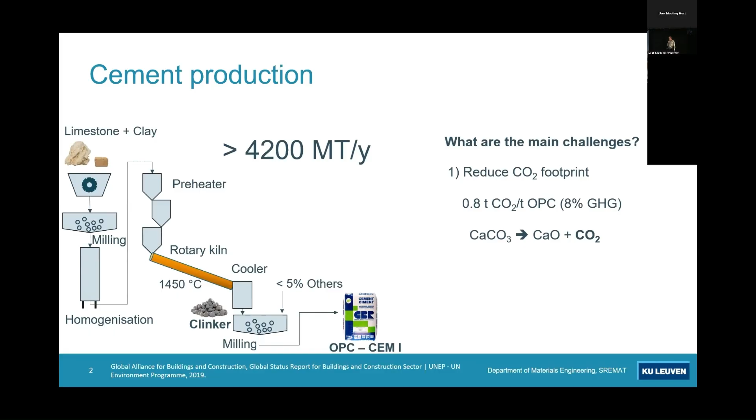So what has been done in the past is to reduce the amount of Portland clinker with various waste residues - fly ashes, blast furnace slags, calcined clays now being very popular, and limestone - to reduce the amount of Portland clinker while maintaining most properties, which for concrete and cement producers means compressive strength. There has been other research trying to find alternatives that eliminate Portland clinker entirely, but these are still, I would say, in their child shoes because they have some technical challenges.

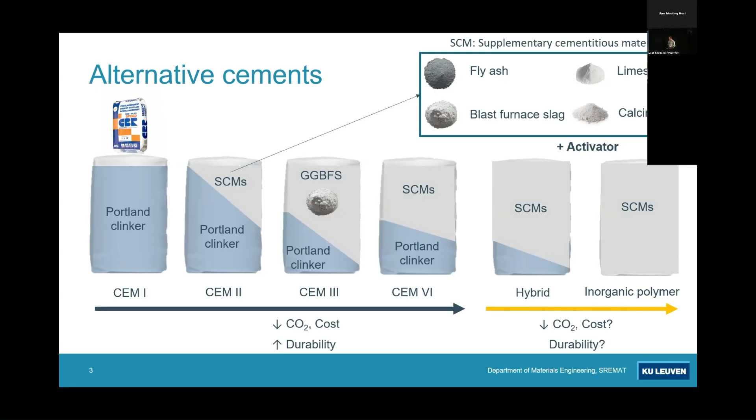So we need quite a lot of supplementary cementitious materials.

We need a lot of supplementary cementitious materials to replace Portland clinker, and there are quite some options out there. However, the most popular options, blast furnace slag and fly ash, are decreasing. Blast furnace slag is probably decreasing due to the electrical transition - processes are being changed, for example, to electric arc furnaces.

Fly ashes are decreasing because we don't combust that much coal. So we need new materials that can replace Portland clinker, and in very high volumes, because the CO2 emissions are somewhat unavoidable from Portland clinker production. So the more we can replace, the better.

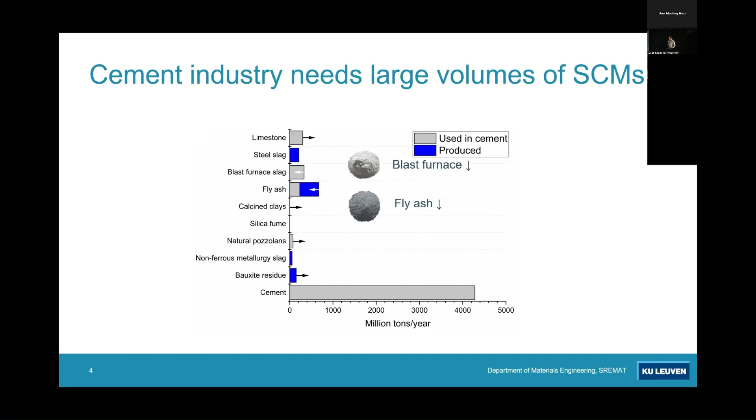So therefore, slags and tailings come into the picture. They don't represent that big a volume compared to Portland cement, but every material can help reduce the amount of Portland cement. Modification of steel slags, for example, is a hot topic which I will also talk about.

In this presentation, I want to put forward two options we mainly investigated in Leuven to form new cement substitutes, these SCMs, and how we use FactSage for that. The first case study is that we do hot modification of slag - we add something to the slag that makes it more amorphous after granulation and more reactive as a cement substitute.

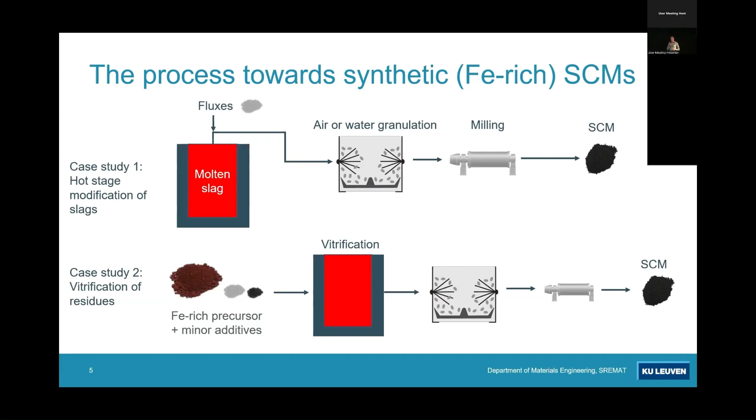Then the second case I want to present is the use of tailings - here, bauxite residue - to vitrify this material and cool it down very fast to create a Portland cement substitute. These processes reduce CO2 emissions because you don't use that much limestone, and it's also quite interesting because you can valorize byproducts which are now used in low-grade applications or even not used at all, for example bauxite residue.

So the first case study is for electric arc furnace slags. I want to thank Holcim and Nucor for sponsoring this work and also letting me share this.

So just a brief overview - there are different routes to produce steel. A very popular electric route is the use of an electric arc furnace, which Nucor in the US is operating for all its plants. Basically, you take scrap, DRI, and some fluxes to produce steel in the electric arc furnace. The slag is then tapped out, put in a slag pot, and that slag pot goes to the slag yard and dumps out the slag, and it cools down there.

And what basically happens is you crush it up, you magnetically separate it to recover some remaining metals, and then you have a slag which has a very low value, mainly used as aggregate, plus that tiny bit of metal.

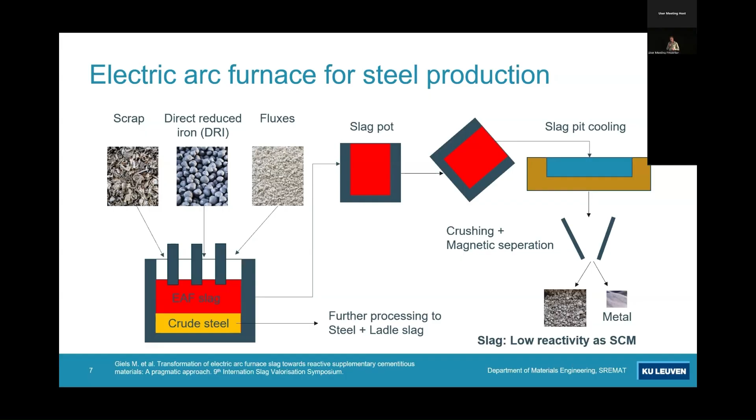So the question was, can we upgrade this, and how should we do this? We proposed a high temperature solution. But if you want to already screen some solutions, FactSage can be something nice to use.

So there are different ways to produce upgraded slag, I would say. We have the solution on the left side.

There you actually take the electric arc furnace slag, but you add reductants such as carbon. You can also use aluminium, like aluminium drosses, to produce a metal. There you actually extract the metal, capturing chrome and vanadium. Then you have a slag which looks like blast furnace slag, actually a very easy route.

Economically, this is a challenging aspect. The steel producers are not jumping for this because it costs a lot of money.

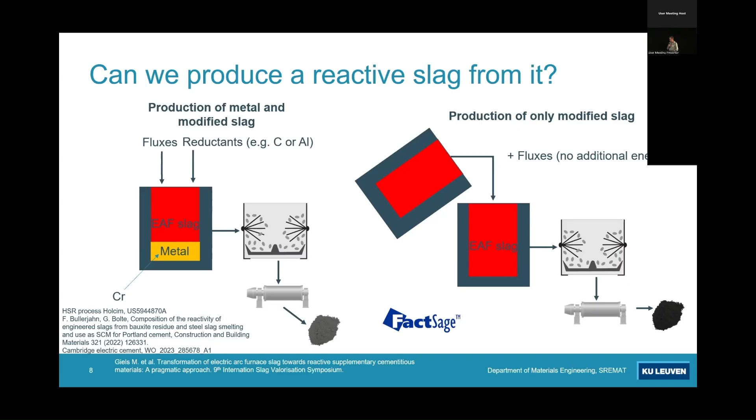So we were looking into a more economical solution by just, when they're pouring the slag out of the EAF, basically putting additions to it—fluxes, minor fluxes—that lower the liquidus temperature while keeping the slag molten. The melt temperature is dropping, but the liquidus temperature is dropping faster, so the material stays in a melt, in theory. Then you create this material, which can be an upgraded SCM.

One more aspect to introduce: liquidus temperature is important because it determines the processing temperature, but also glass forming ability. We want to create something amorphous, and to create a glass or amorphous structure, we have to cool our material very fast. For steel slags, it's very difficult—it's very basic, so it crystallizes very easily. So we have to reduce the critical cooling rate.

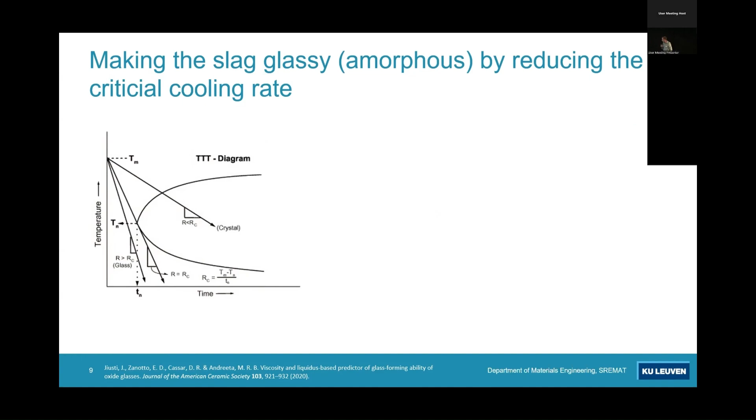The critical cooling rate is the rate at which you cannot form any crystals anymore. If you put it in a TTT diagram, that's the line on the left which you have to obtain. Experimentally this is difficult, but it can be done.

But there's a nice gem I discovered some time ago, a nice paper linking the critical cooling rate to the viscosity and liquidus temperature. Basically you can imagine it a bit like glass making. A good glass has a low liquidus temperature and a high viscosity—a very viscous mix and a very low melting temperature. That's ideal to form a glass.

Of course, with slags, going that viscous is not possible—you will not get the slag out of the slag pot, but this is an ideal scenario. So there's a formula devised in that paper that lets you calculate glass forming ability.

So can you get these parameters from FactSage? Yes—just using the equilib and also the viscosity model gives you these parameters. We can also measure this at KU Leuven, but it's easier if you can calculate it much faster.

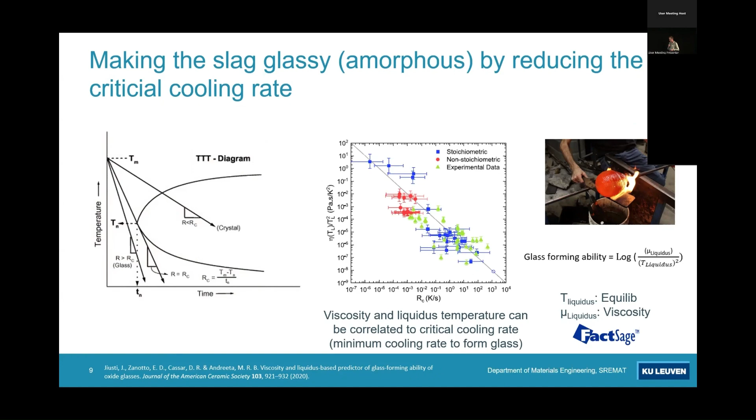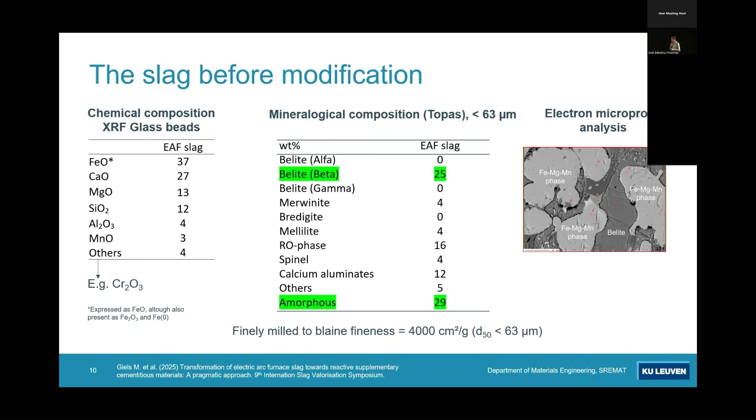So just something about the slag before going into the results: this is typical EAF slag, from Nucor, quite iron rich. If you look at the slag as is, it has very low amorphous content. For the cement people, we would like to see that amorphous content higher, because amorphous most of the time means more reactivity. But there are also other minerals inside which can be interesting as they have latent hydraulic properties. However, for now, we focused on optimizing the amorphous content.

So we used FactSage to do some modeling. Basically, we added silica and alumina to increase or decrease the liquidus temperature, and checked the effect on this liquidus temperature. We saw silica and/or alumina addition reduced liquidus temperature—not so new yet. We did that also to see if the melt is freezing.

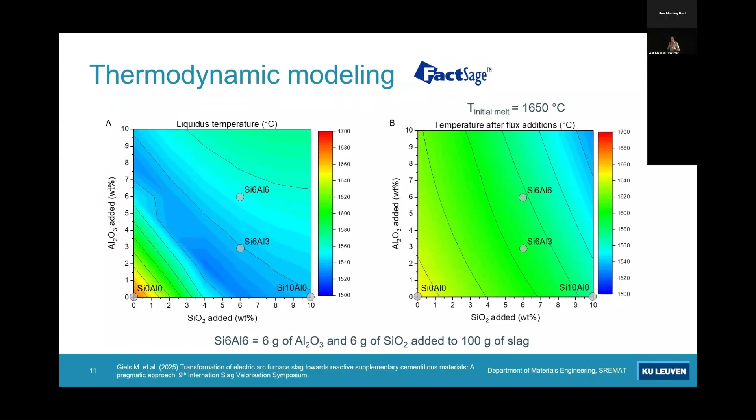If you add these additions, after about 2%, more or less, all the additions you do lower the liquidus temperature much more than the melt itself. So in theory, the melt should not freeze when you add these additions.

Then we can also model the glass forming ability. The more bluish it is, the better the glass forming ability—so the lower the critical cooling rate you need. We've seen that if you add some additions, the critical cooling rate, or the glass forming ability, becomes bluish, which is good.

I've plotted here, for some residues we had produced in our labs, the amorphous content versus the viscosity over the liquidus temperature. We actually see that from a value of -6, you get close to 100% amorphous, and that's actually the target.

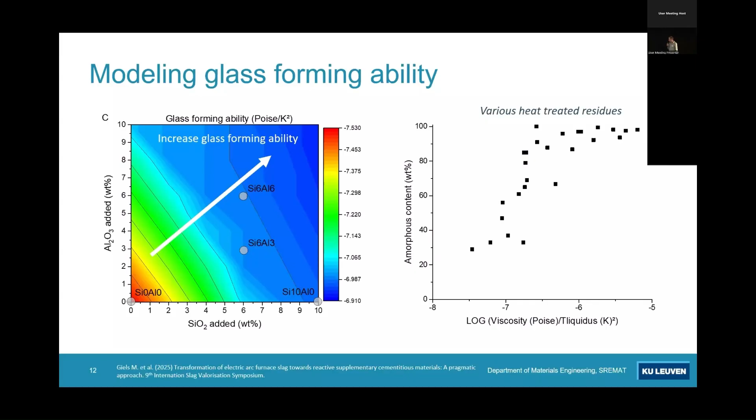However, we know it's very difficult with steel slags to do this—we have to add a lot of fluxes. So we will be somewhere around 60% amorphous, around -7 to -6.5 with respect to glass forming ability.

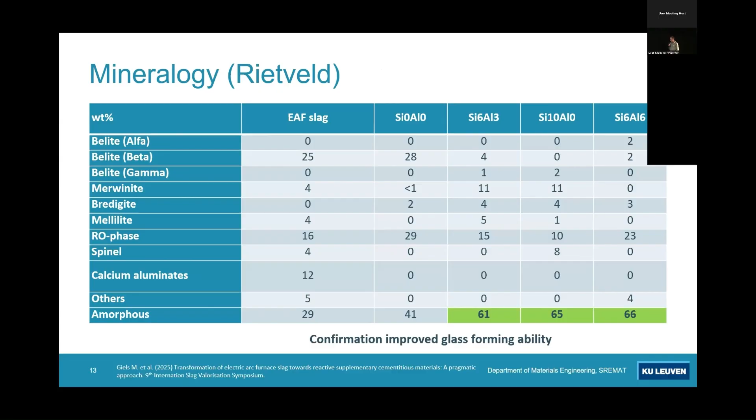So we did these tests using this new parameter to guide our experiments. We chose some experiments as indicated on these heat maps, and found that indeed, the more you add silica and alumina as predicted with that formula, you can create more amorphous content—in line with what we expected based on our plots, that we could get around 60% amorphous.

So then the final question, which is most interesting for the cement people, is: is it now working? Can you make it amorphous with these small additions, and is it actually reactive? And once we make mortars, ideally we have similar strength with respect to the Portland cement reference. We tested this for two slags, and the optimum was the same for both slags.

Surprisingly, because this material has a very different chemistry to the known SCMs, it's very iron-rich, and these iron-rich SCMs can be, for example, an alternative to blast furnace slag, as we see from performance.

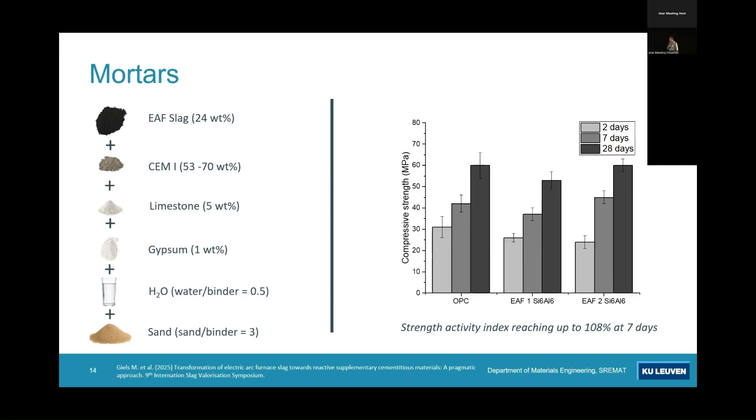So I've done this case study also for other residues, for tailings. One popular, or voluminous, tailing is bauxite residue - not so popular for the people living around these tailings. The world production is quite big, 150 million tons per year, but with respect to cement it's quite low. Locally though, you have quite high volumes.

They're scattered around Europe. There could be one tailing in your backyard, but maybe it's covered. And now, these tailings are not really considered or used, because they're very alkaline, and they don't have a specific use. They fall out of a lot of categories to be interesting as a raw material.

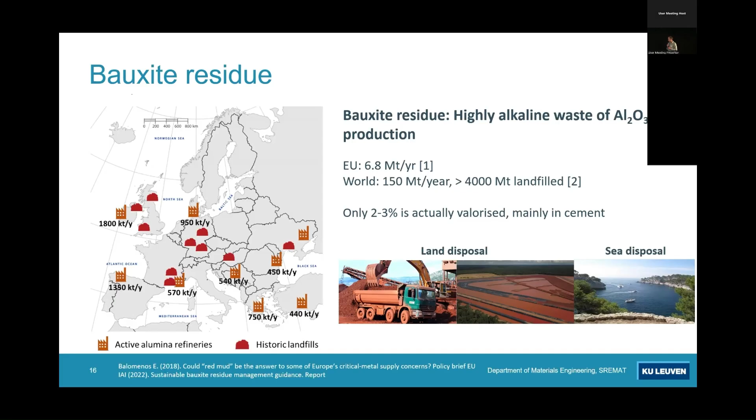So they are used in some cases as an iron and aluminium source, depending if there's a Portland cement factory nearby, but for the rest there's not much use so far. So we thought - and it's actually a proposal of my colleague, Tobias Hertel - why not vitrify this residue to create an iron-rich melt and actually create a new Portland cement substitute?

So I've done this in pilot trials. We even made it at Technopark with Jan Urbanek, really producing this material in a rotary kiln, which was an interesting experiment. We were able to produce an iron-rich melt in a rotary kiln. It has quite some challenges, still not optimal, far from it, but it was possible.

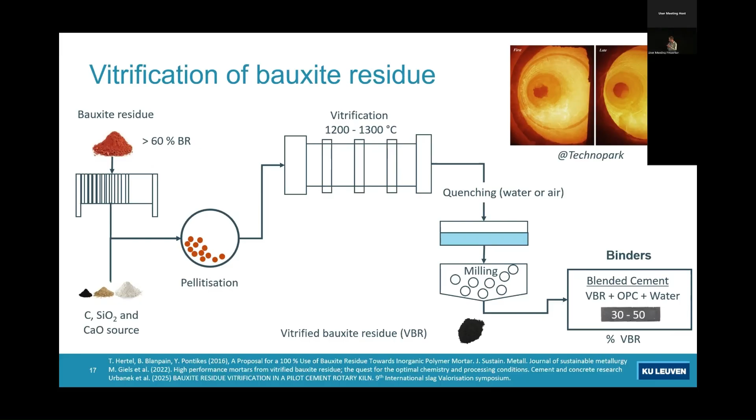So this was possible, but the question for you is, how did we use FactSage? We calculated three different items: liquidus temperature - the lower the better, because at the Portland cement kiln we can go up to 1450 degrees Celsius, so the lower we are, the better. We want to stay at a maximum of around 1300 degrees liquidus temperature.

Amorphous content, which we could calculate using the glass forming ability - there we want to be around 70 to 80%. We don't want 100% amorphous content because there are quite some heavy metals in the bauxite residue, chrome and vanadium, and we trap them in spinels. So we want some crystals, not too much because it will lower the activity, but it can help.

And then the R3 heat, we could also predict using molecular dynamic simulation data and PDF, pair distribution function data. It's a bit more complicated, but we could also get an idea of what the R3 heat is.

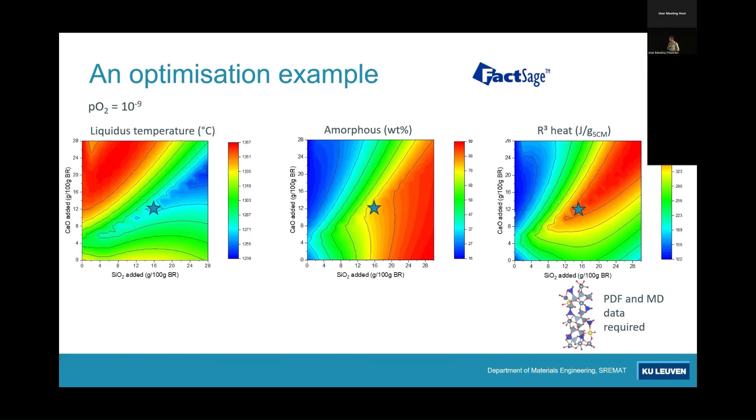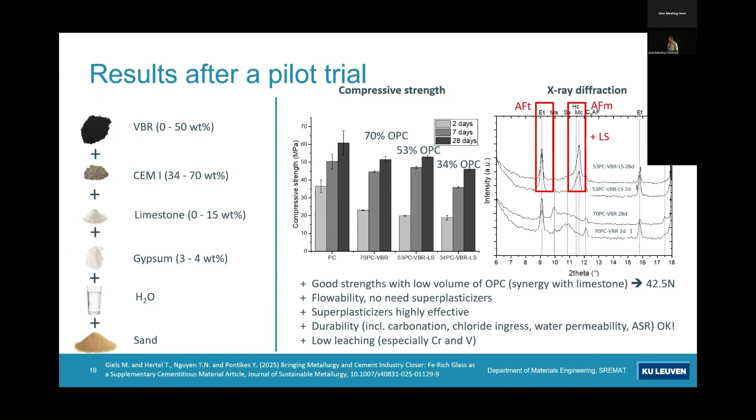So this is something we have been doing, but we want to go further. We got some money from KU Leuven to go a bit more into the scientific aspects of what we are doing, and together with Mathijs Schuurmans, we're trying now to data mine FactSage. It's a nice software, however we want to do a lot of calculations, so we want to be a bit faster - we want to mine it to get the properties I was mentioning before.

For example, I made a simple model here with neural networks. Basically we want to easily see what is the best or closest chemistry if we have a certain residue, and which additions we need to make sense of. And the question to you, maybe for our coffee break: we are also interested in latent and sensible heat calculation. I know you can get enthalpies and heat capacities from FactSage, but how to get to the real latent and sensible heat in an open system - that is interesting maybe to discuss.

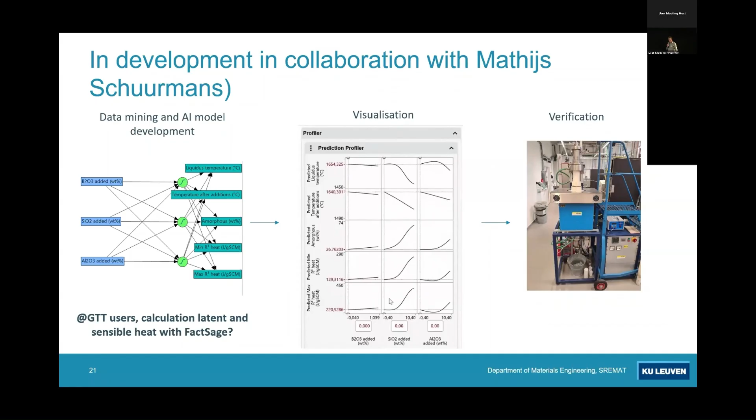So I thank you on behalf of the team of KU Leuven. This was at the last slag valorization symposium. If you have any questions, yeah.